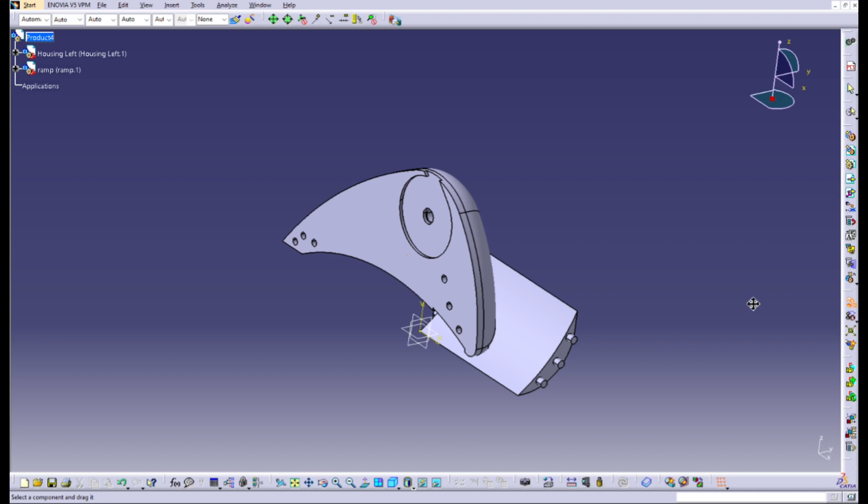To overcome the problem, we can choose a tool called manipulation, and we can rotate using the z-axis rotate on the ramp. So the ramp will be rotated along the z-axis. Just rotate it like this.

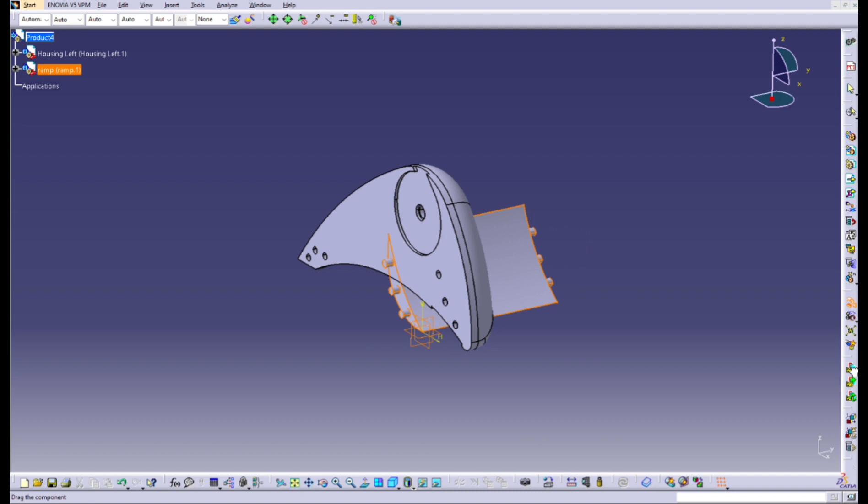We don't have to be really accurate actually. After it's rotated, we can just move it along the y-axis, give it some space, and the x-axis, to line it up. As you can see, it's not perfectly aligned.

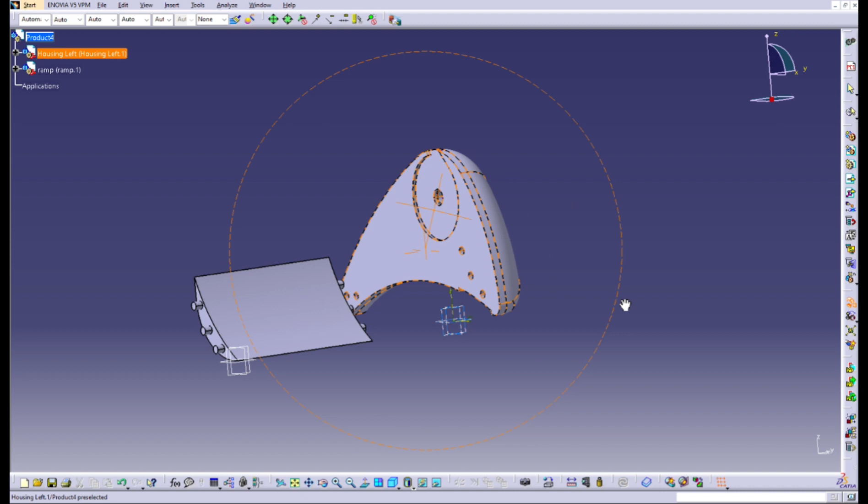To make it perfectly aligned, we can use another tool called coincidence. Basically it will center out all of the circles.

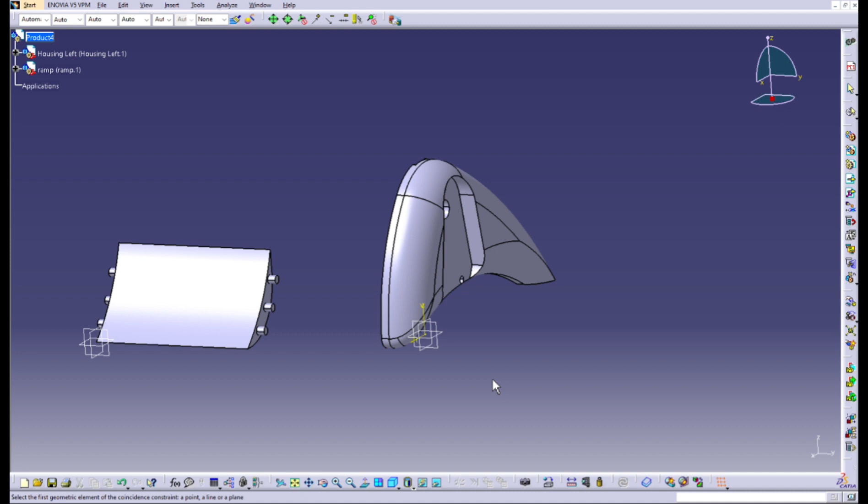First I'll explain the basic concept of our assembly. To assemble all of the parts, we're using something like a gunpla, so it's only a matter of connecting the male and female parts. Of course, it's not what they use in real world scenarios, but our team decided to use it since it was easier and simpler.

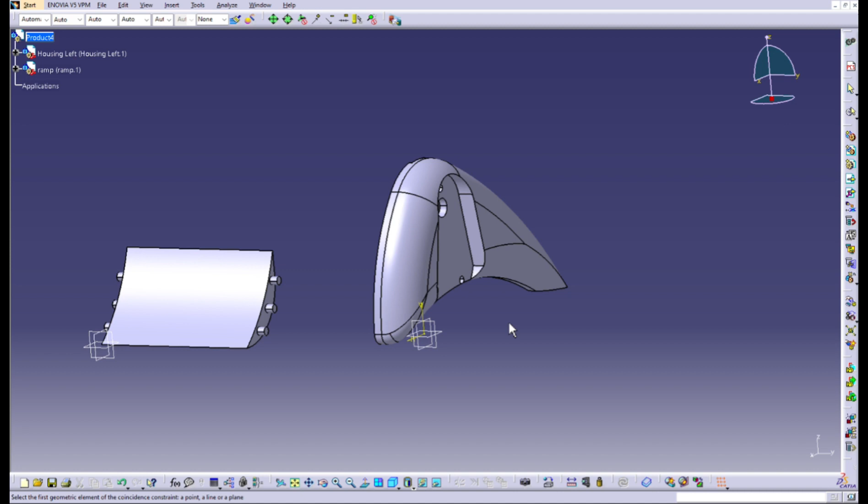So we have our coincidence tool right here, you can just click it. As you can see, there are 3 male parts here, 3 male and 3 female.

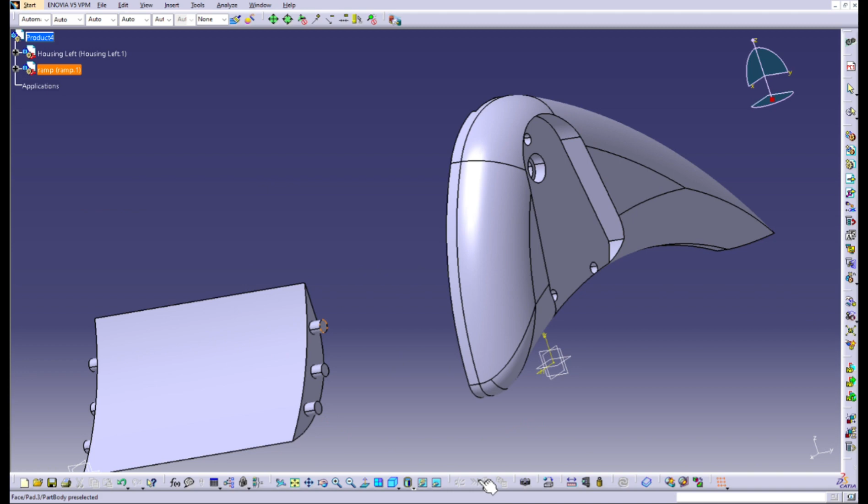We can choose the very top one for the male and the very top one of the female. If we update it, yeah, it's going to be perfectly aligned.

Actually, we don't have to connect the remaining male and female since it's going to be perfectly aligned anyway. But for these parts, I'm going to coincide it with the coincidence tools. There's redundancy because it's perfectly aligned.

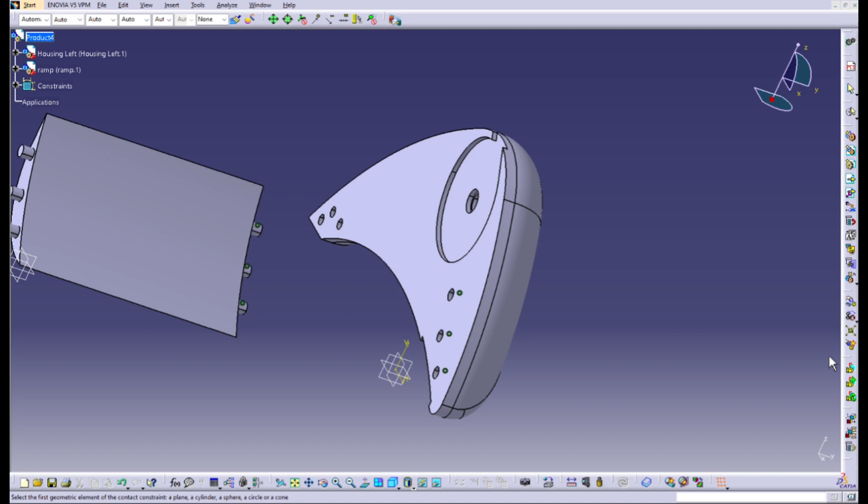Since it's aligned already, we can move on to the next step, which is connecting the parts. We can do it by choosing the contact tools right over here, by choosing this face, and connecting it with this face.

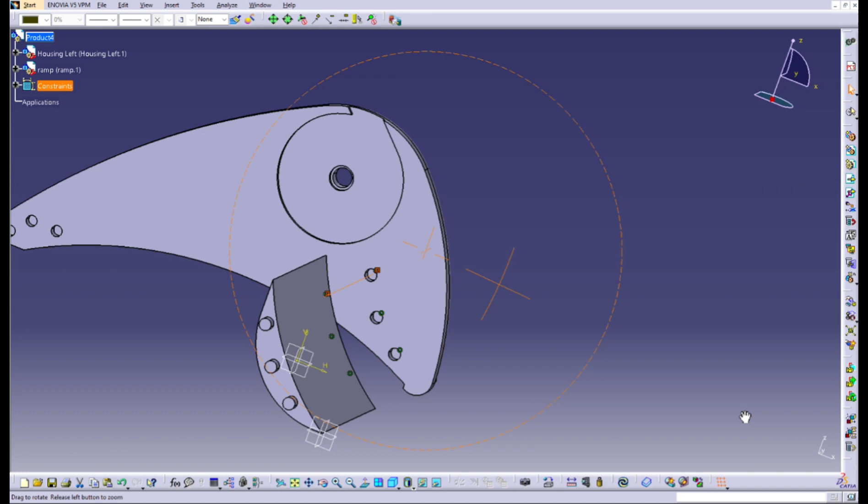Since the length of the male and the depth of the female are the same, when this face touches the other face, it will be connected perfectly.

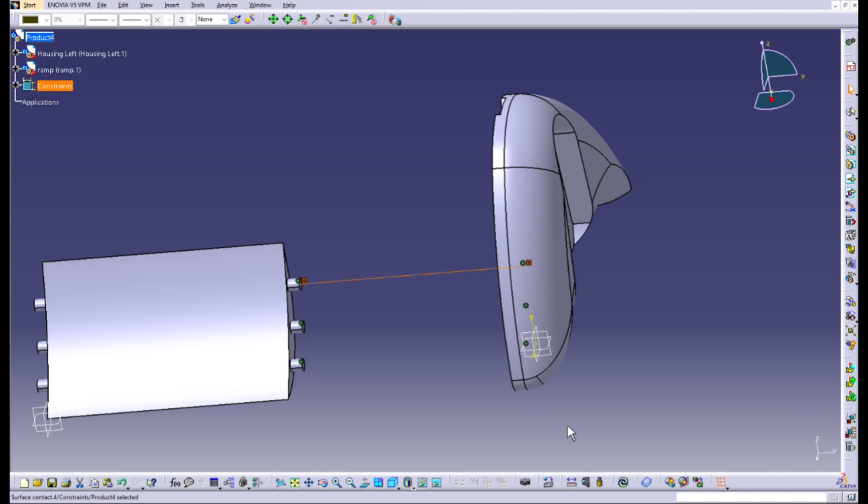To do that, we can just update. We can choose it through the edit toolbar, update, or we can do it right here, or we can just press Ctrl U, which I'm going to do right now. Okay, Ctrl U, everything is updated and it's connected.

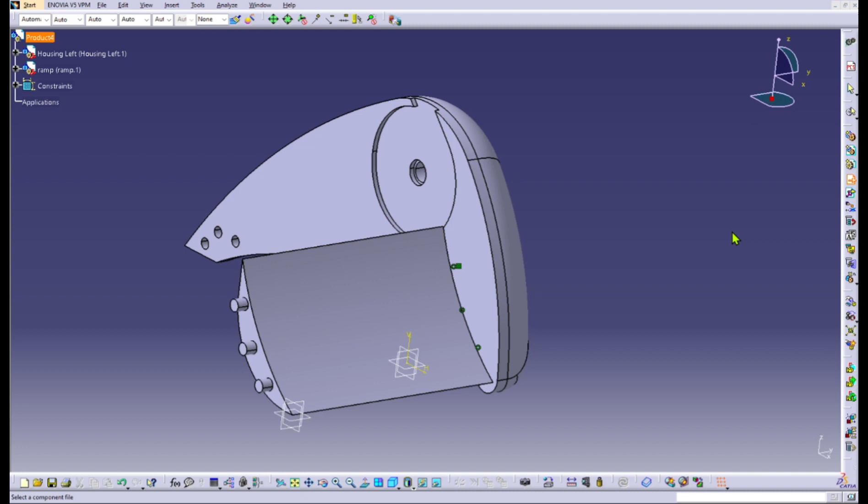One part's done. Let's move on to the next part, which is connecting the bracket. Same as before, choose this icon, choose the product, and choose the parts, the bracket.

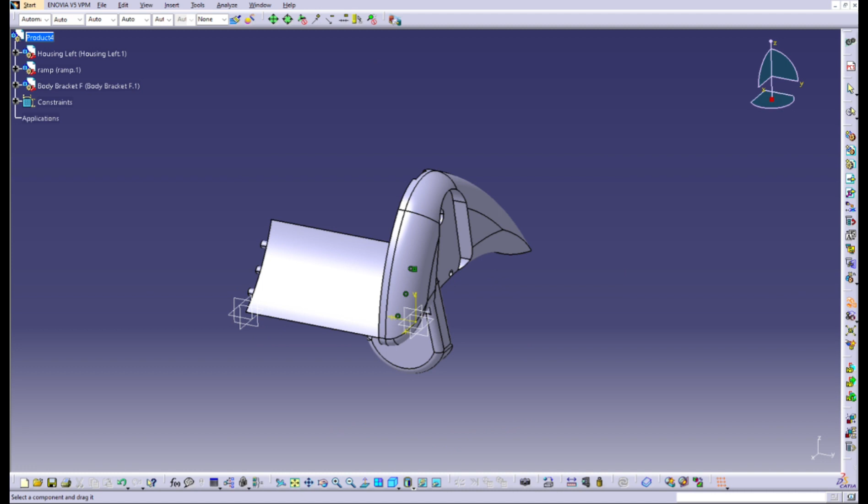The problem is the same as before, it's not aligned, so we have to do the manipulation again: along the z-axis, move it along the y, along the x. Okay, we're done, and you can just coincide it from here.

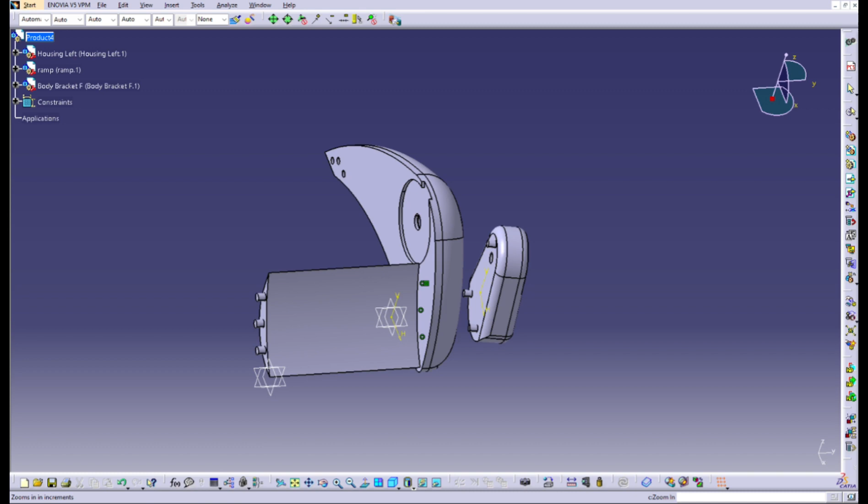Okay, so why am I choosing the middle part of it instead of all of the three male and female connectors? It's because all of the connectors here in the housing and in the bracket are calculated already. So since the middle part is perfectly aligned, all of the three male and female parts will be also perfectly aligned. So we don't have to do it.

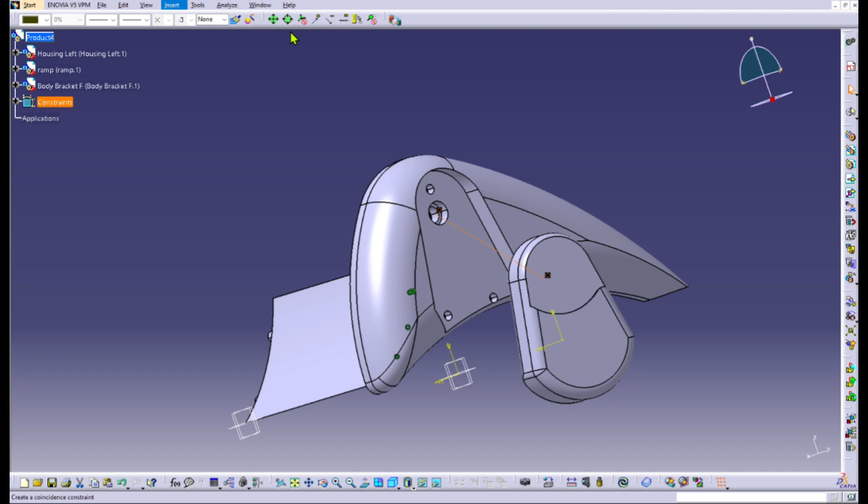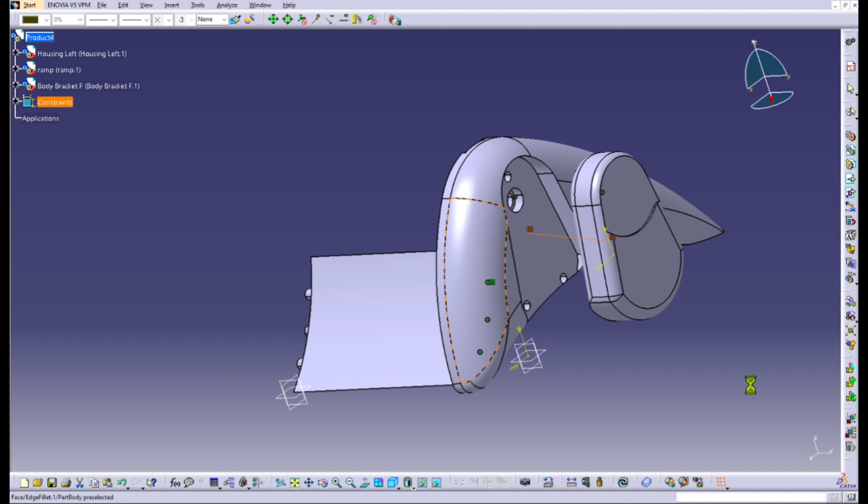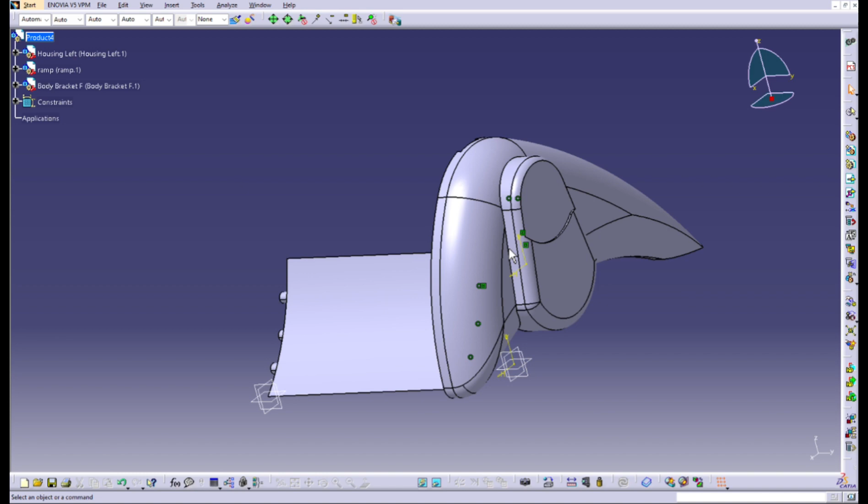Okay, let me show you. Update. Okay, it's perfectly aligned, and we can connect it by using the contact tools again. Choose it right here, choose this part, and see, when it shows something like this, a square one means connecting tools, and the circular one means the coincidence tool. Since we have that, it's good already, and we can just update it. Okay, when it turns green, it's already good.

Okay, now we have two parts connected into the main housing. And for now, let's move on into the next part. You can choose it from here, product, and for the next part, I'm going to choose bushing.

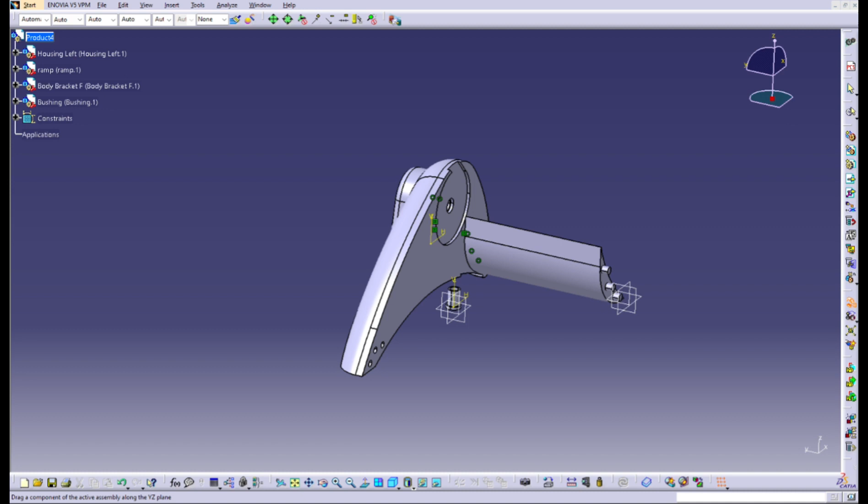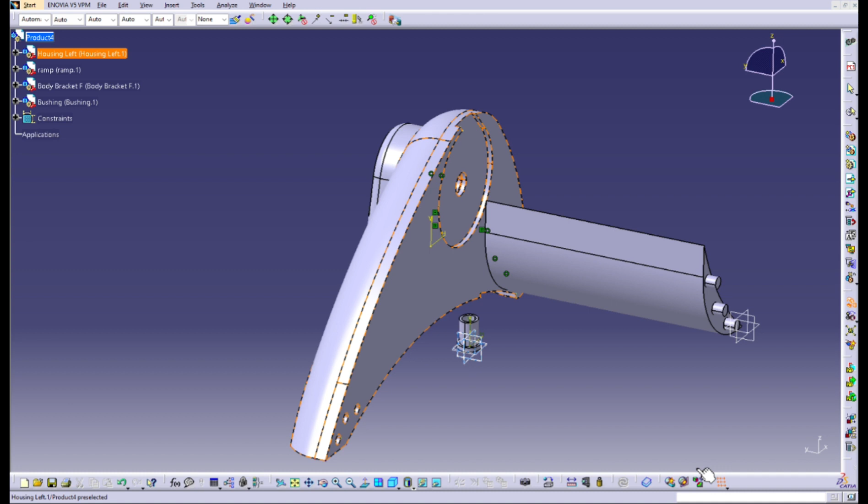Okay, so the bushing is not aligned and facing a different direction than the others, and we can fix it with the manipulation tools. As you can see here, there's the y-axis over here. We can just rotate it... no, I'm sorry, that's the x-axis. So we can just connect it, rotate it along the x-axis.

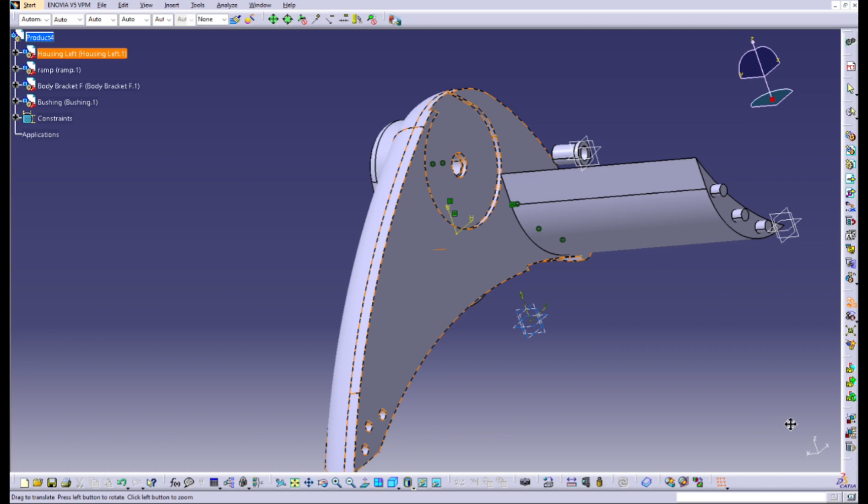And move it along the y, move it along the x, the z. Okay, here I wanted to give it some space because the space is very tight, and we have to connect this face, a very small face. So I'm giving it some space. Okay, same as before, we have to connect it, but first thing first, we have to coincide it.

Middle. We can just update it. Okay, it's aligned already. Since it's aligned already, we move on into connecting it.

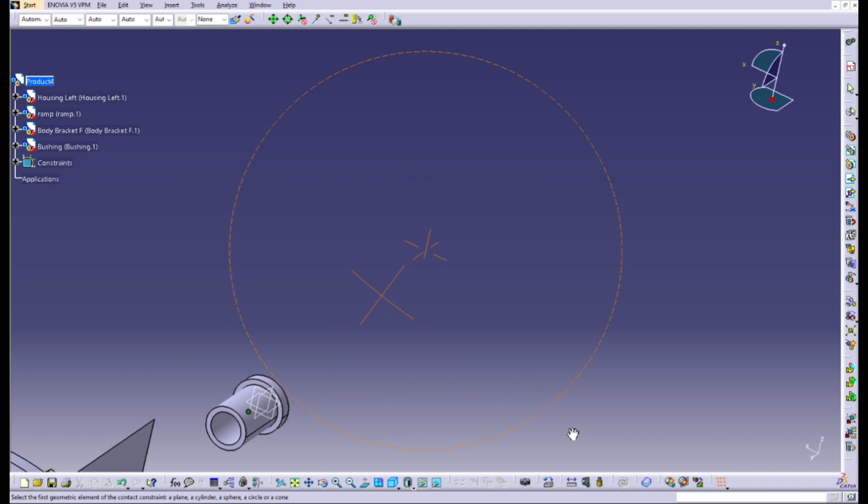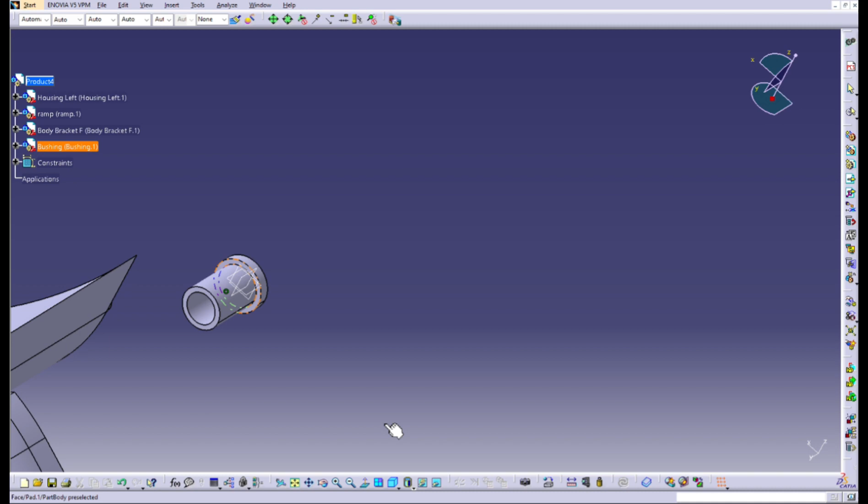Okay, so the face over here on the bushing. Make sure the two lines are highlighted. That means we're not choosing the line, instead we're choosing the face. Right here, I'm going to try. Okay, so both of the lines are highlighted, that means we're already choosing the face, and just left click, and same as this one, we're going to connect this face into this face.

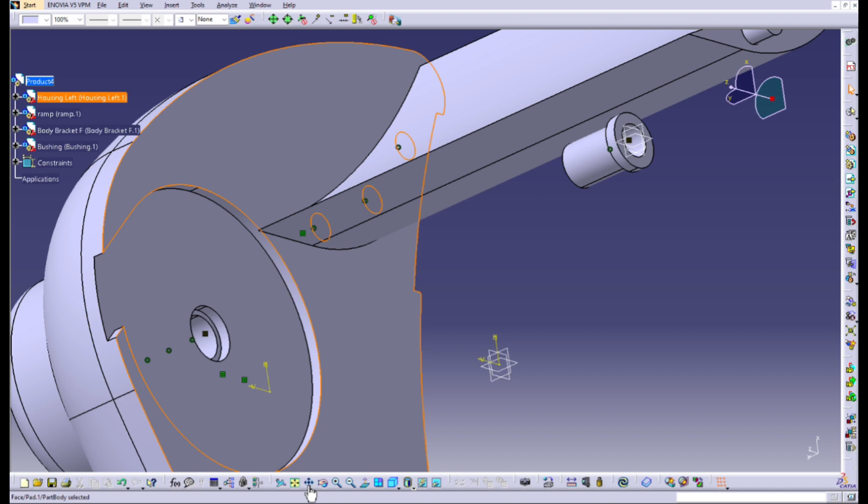Okay, the square symbol appears, and we can just update, and it's connected. It's all good.

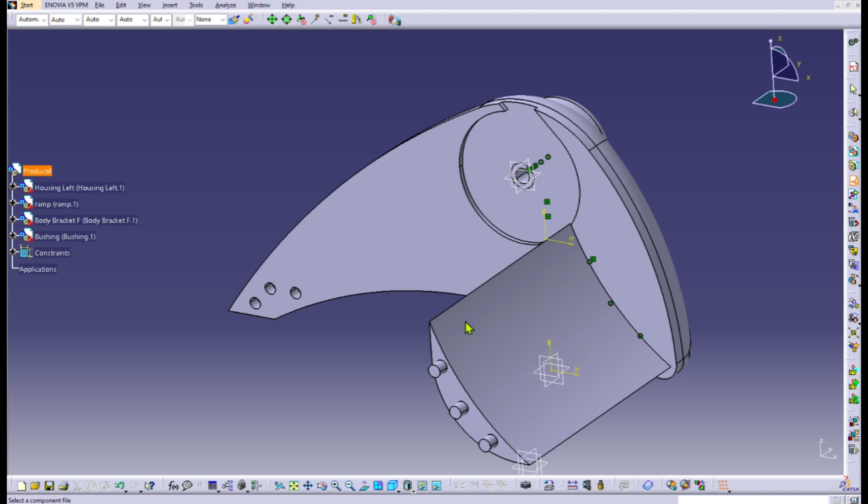Okay, now we have three parts connected into the housing. Now let's move on to the next part, which is the shaft. Okay, I'll open my file. Okay, now we have the shaft, but same problem.

It's not facing the right direction, so we have to do the manipulation again. Okay, we have to rotate it along the x-axis right here. Rotate it, move it along the y, move it along the z.

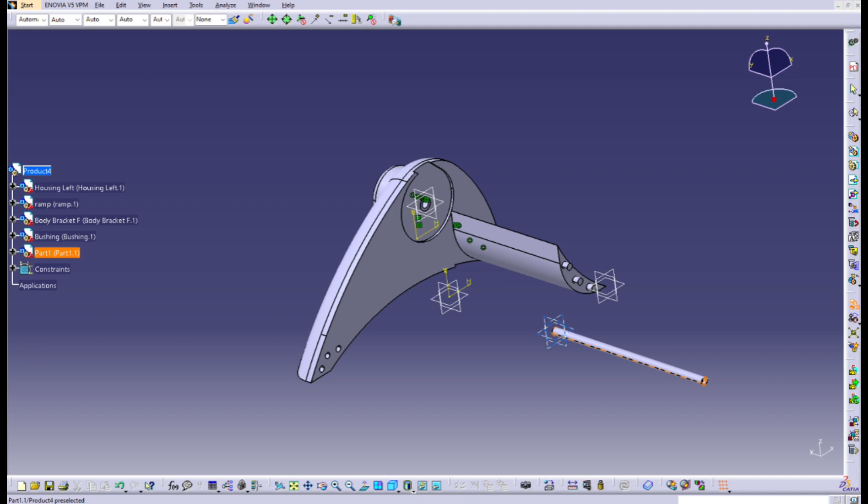I think it's good. Now you just have to coincide this shaft into the middle of this hole. Okay, just Control U, and it's aligned. See that symbol? Green symbol means good.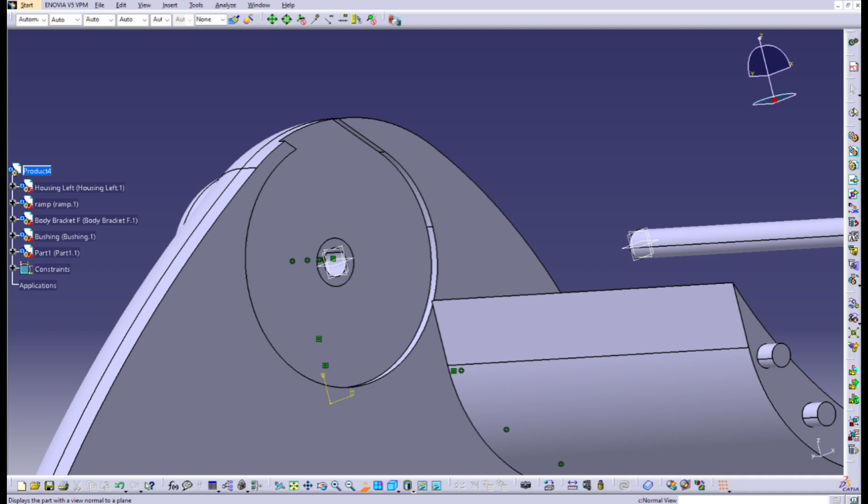Okay, now we have to connect it. Okay, make sure to select the face, and after this we have to connect the shaft into the body bracket. Update. Why body bracket? I'll explain it after this, after we've done the rotor.

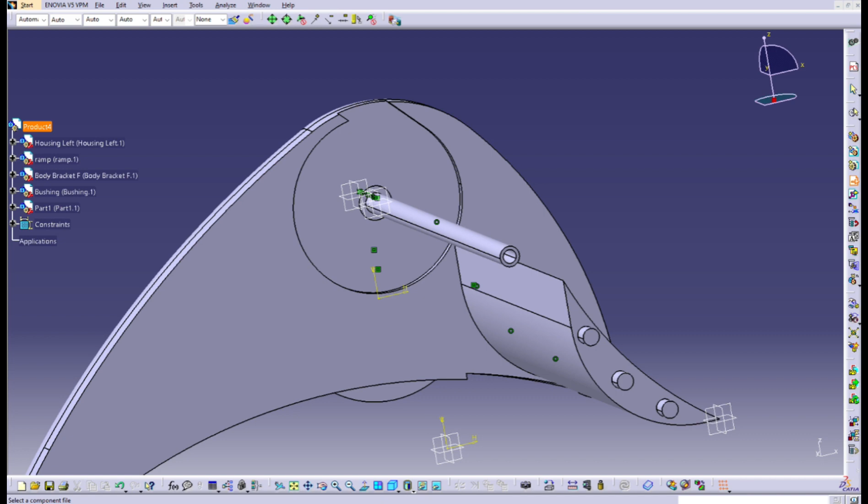Okay, now we can move on to the next step, which is adding the rotor into the build. You can do it by choosing this icon and choose product, then choose the rotor.

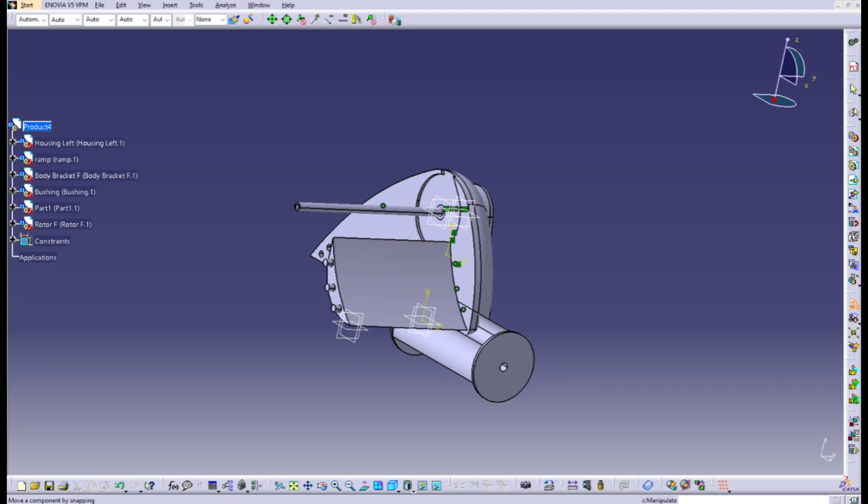Okay, now it's always the same problem, it's not facing the right direction. Okay, we have to do the manipulation again. Okay, it's facing the wrong direction, sorry. Rotate it along the z-axis. Move it along the y, along the z.

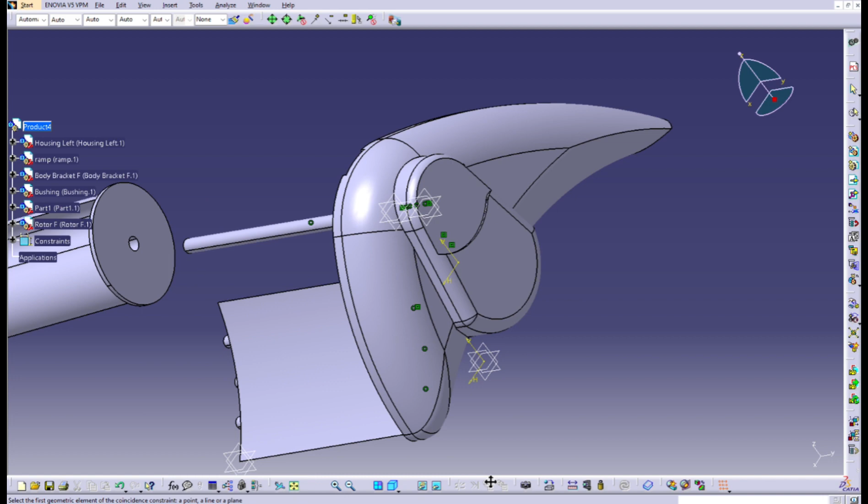And we can just directly coincide it from here. We don't need to rotate it very precisely, the tools will do it. Okay, update, and we have to connect the rotor into the shaft.

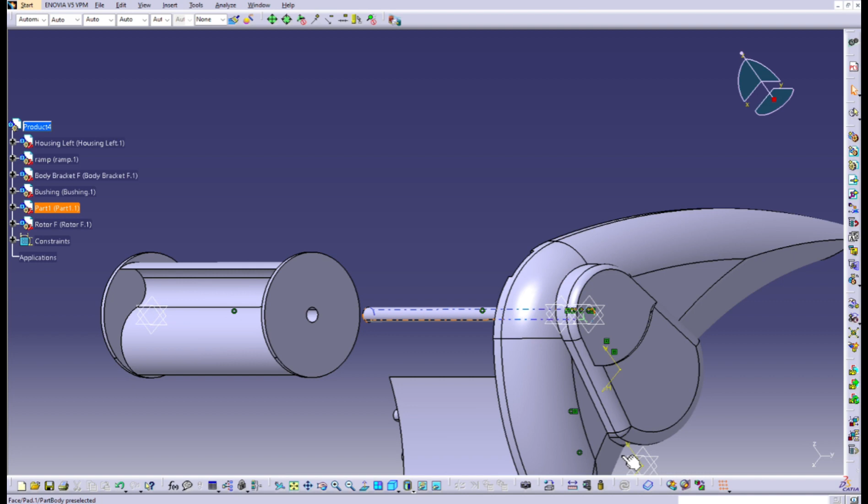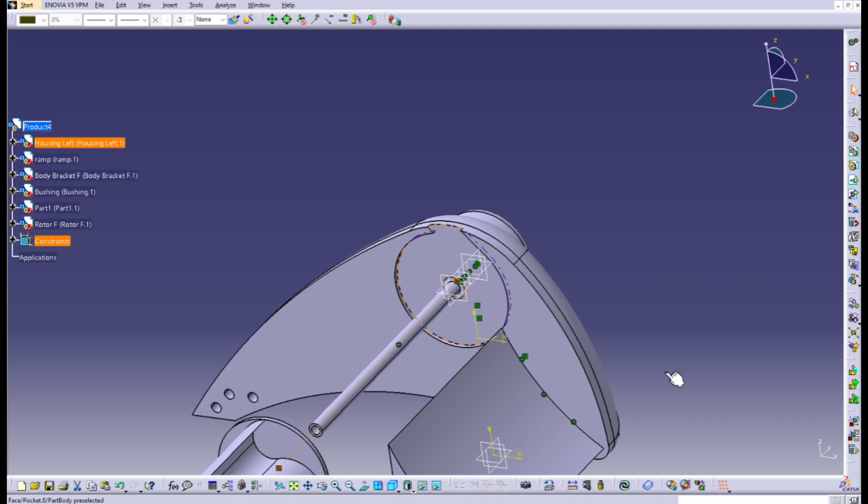But since the shaft doesn't have any surfaces to line to, we can just use the contact tools, and choose this face, and we can just select this face on the body bracket. So we have to select the face of the circle on the rotor and select the face of the circle on the body bracket, I mean the housing, and we can just update it. Okay, and it's connected right now. So basically this shaft and rotor are connected.

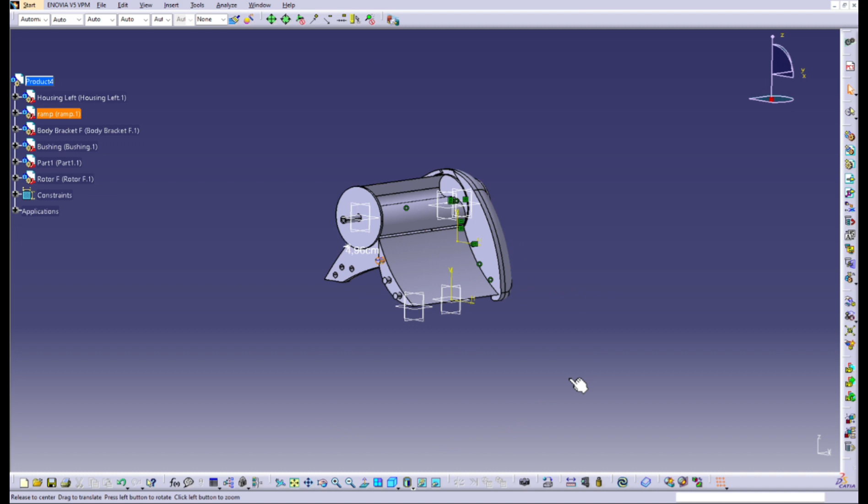Okay, now since we got the rotor, the body bracket, the ramp, the bushing, the shaft, it's a matter of completing the builds. To complete that, we have to put the right side of the body bracket. Oh yeah, but first we have to connect the bushing, the right side bushing.

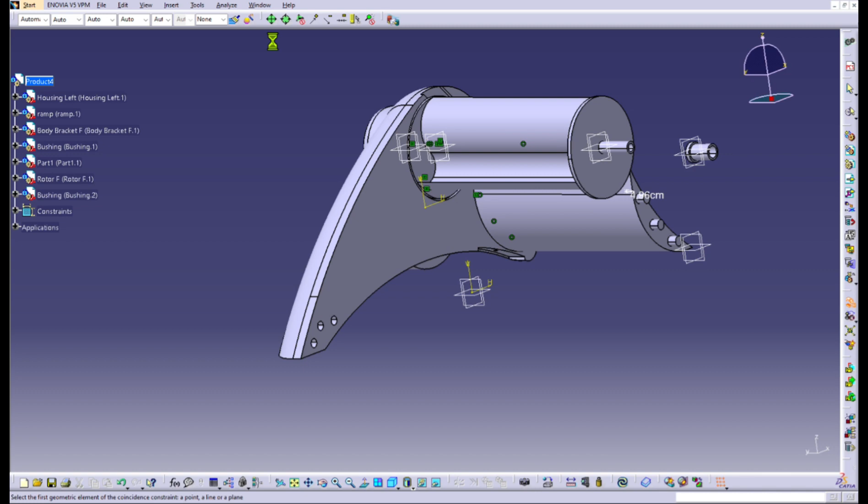Okay, now we have the same bushing. It is going on the right side, so we have to rotate it again in the X direction, move it along the Y-axis, move it along the Z. Use the coincidence tools to connect and align them all.

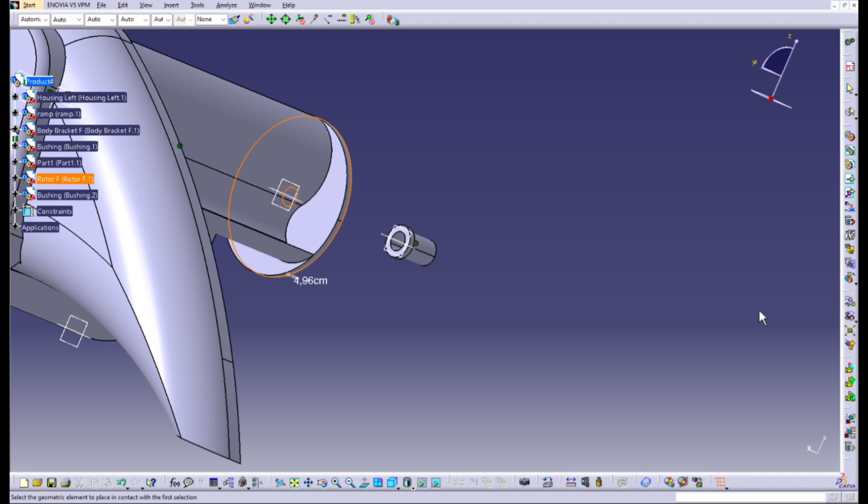Okay, connect this, update. It's already connected, and we can just make contact here, or we can make contact here to the housing.

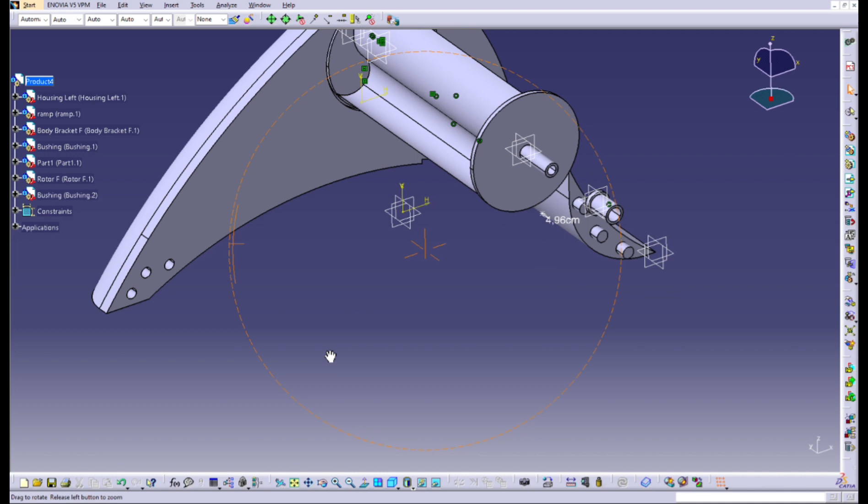Okay, so right now I'm just going to put the housing, the right side housing. Oh yeah, but since the right side and the left side housing are separated and there is nothing to support them all, I make another part to support it, called the housing connector.

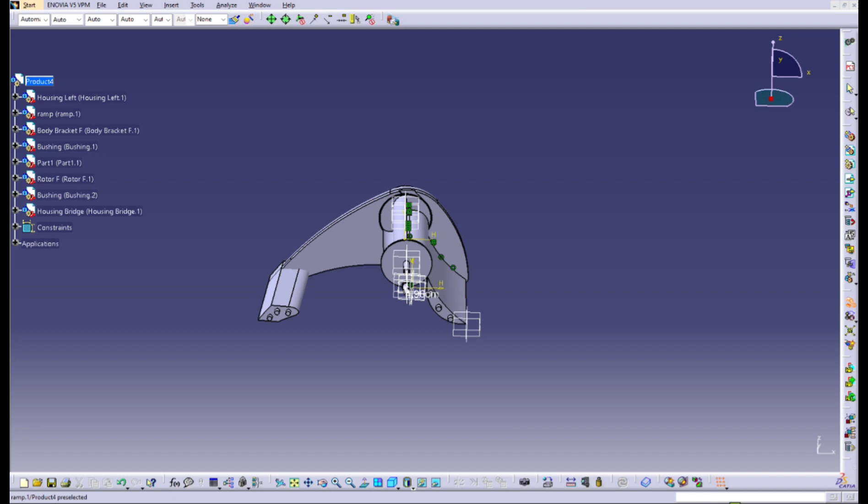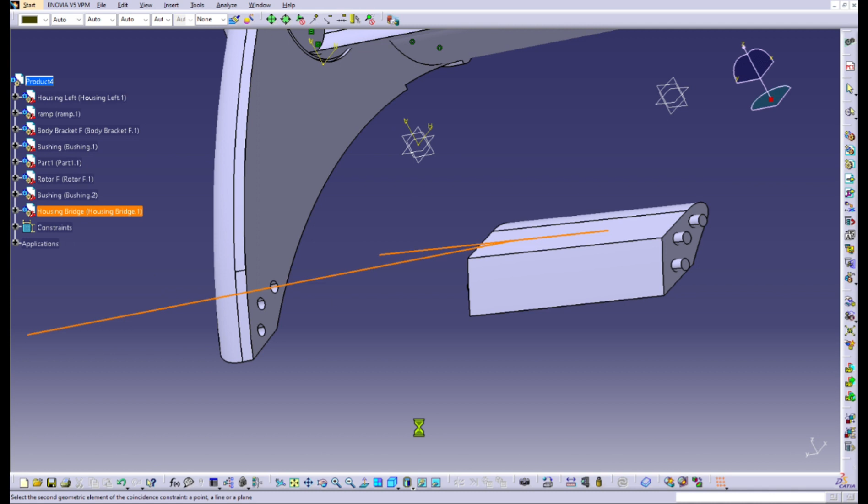and make a contact here to the male part, female, and update. It's already connected. Okay, we got the connector, and now we can bring the right side housing into the build.

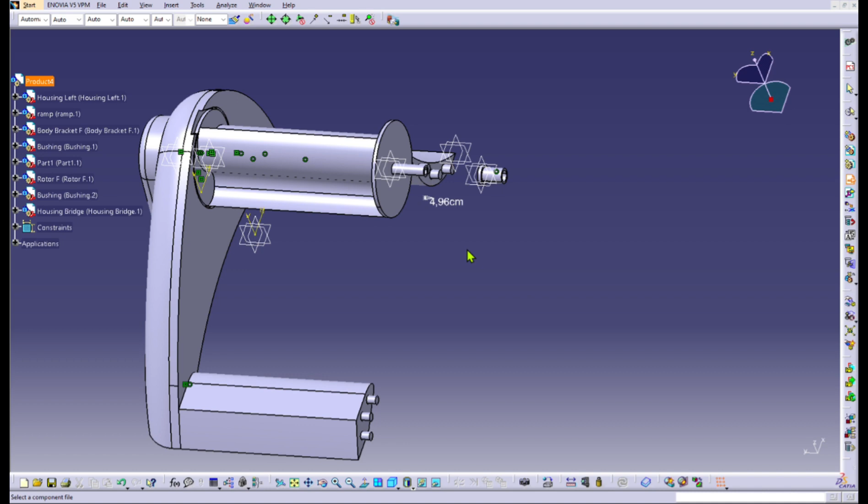Okay, this is our right side housing, and we have to do manipulation on it. Bring it to the right side, give it some space. Use the coincidence tools to make sure that the middle part of the housing is connected

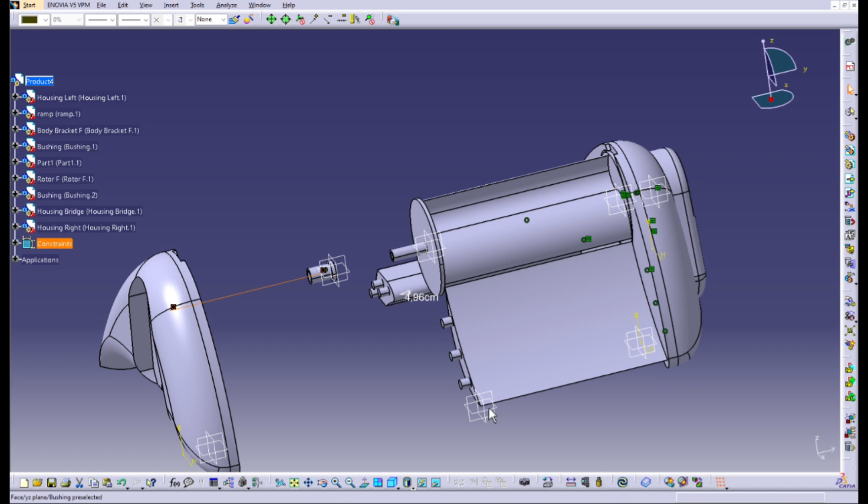into this bushing. Since the bushing is already aligned with the shaft, the right side of the housing will technically align with the shaft also.

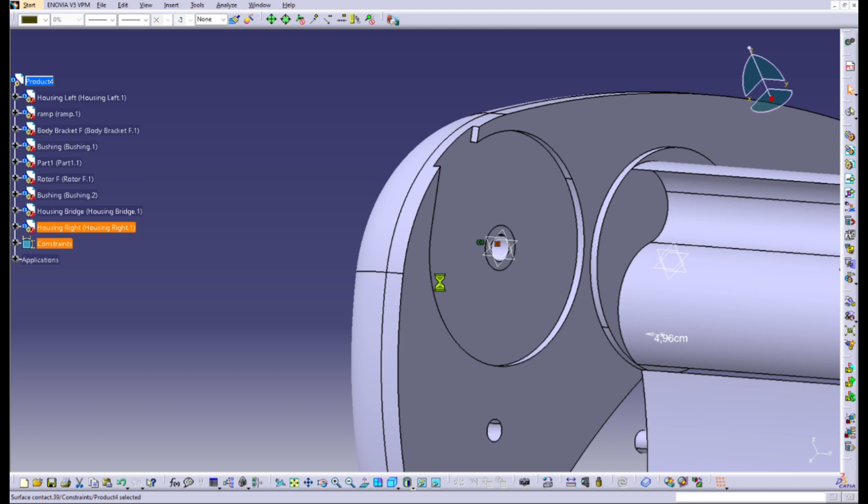Now we just have to use contact tools over here and connect it with this face of the bushing. And update, it's now connected, and you can use contact tools to connect it all.

Now it's connected. Okay, so if you really pay attention on the first step, the whole left side of the housing is 5 centimeters, but the right side of the housing is 4 centimeters.

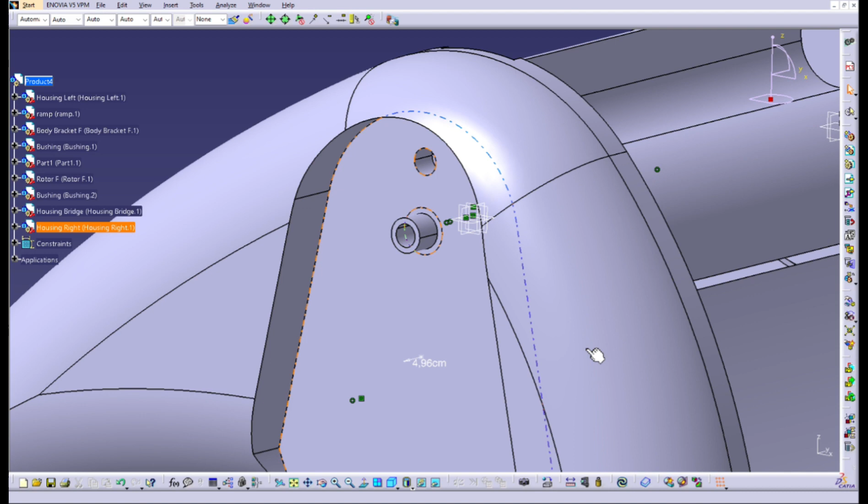And which one is right? Why is it different? So it appears there's something like an error on the left side. It's supposed to be 4 centimeters, but right now I already updated it, and we can see right here.

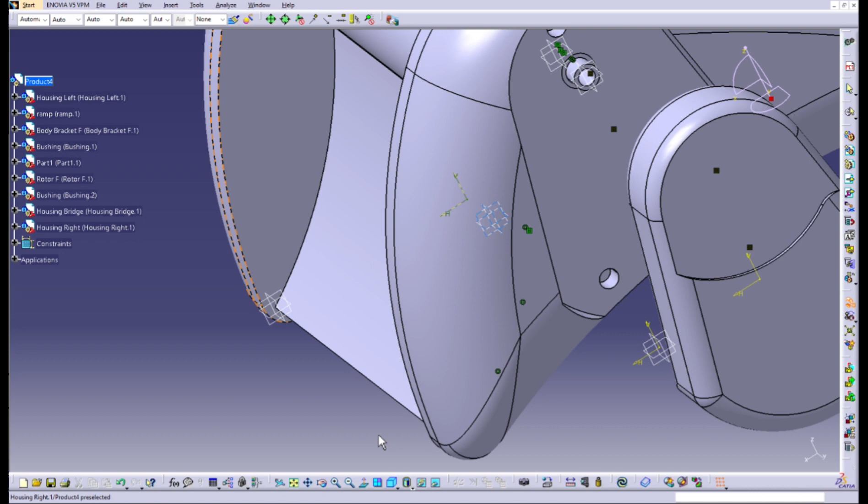Manipulation, okay, we can move it. Now it's completely sealed. On the first steps, the step when I connect the body bracket and the housing, you can see that the hole

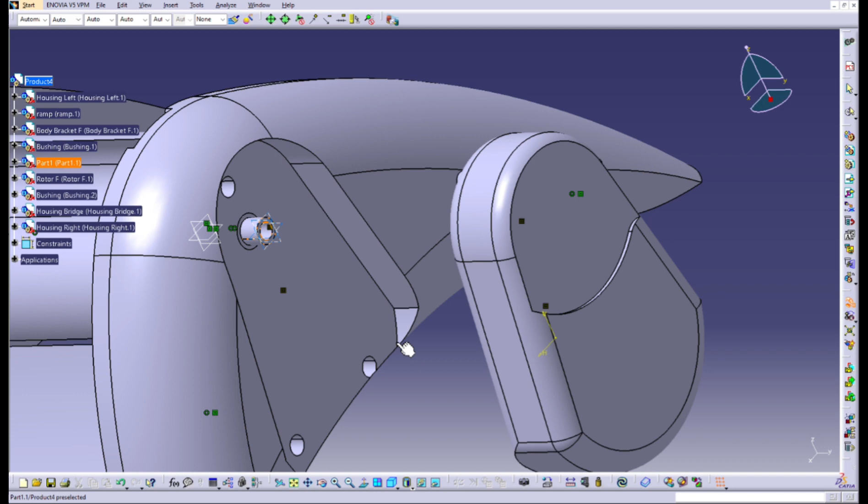is not filled. There's a gap between the housing and the bushing. But right now it's already fixed. It's my error. Okay, since everything is clear right now, we can move on to the next steps.

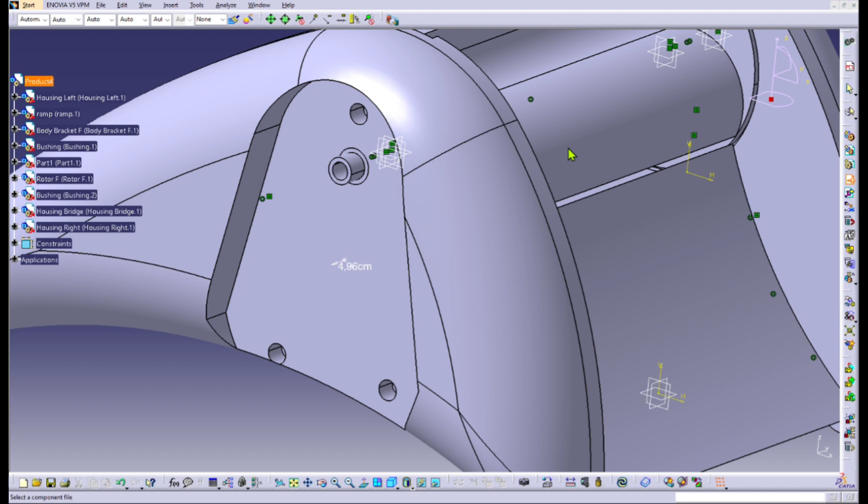Okay, now the last step is connecting the body bracket for the right side of the housing. Okay, we have the body bracket here.

It's facing the wrong direction, so manipulate it, rotate it along the Z-axis, and move it along the Y. And since then, we can just coincide

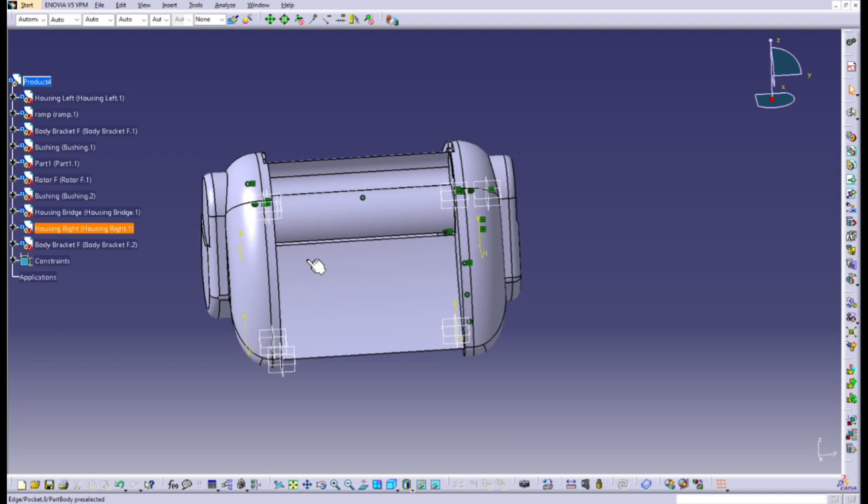this part over here. Make contact also on the male and female part, and just update. Okay, now the main component is already completed, but we have one more

part here, which is the base, or the bottom part, or the foot part of these builds. Okay, now we have the front base, or the front foot of these builds.

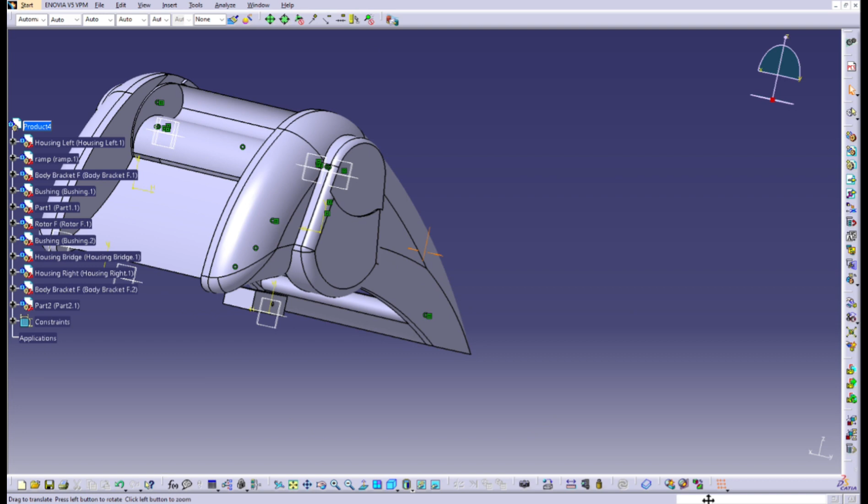Now it's not aligned properly. We just have to rotate it on the X-axis, rotate it on the Z-axis, move it a little bit to the front along the X-axis, and give it some space.

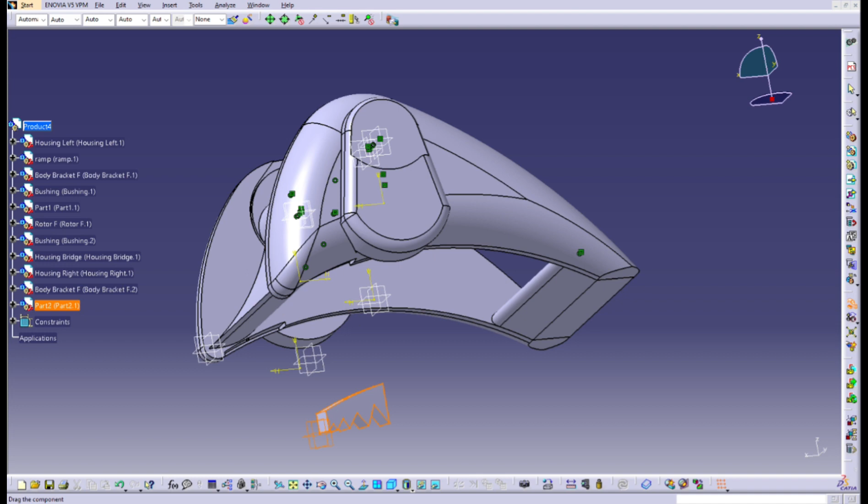Okay, now as you can see, it's a female, and it's also female. Then how can we connect it? Since both of them are female, I have a part here called the base connector, which will act as the male part.

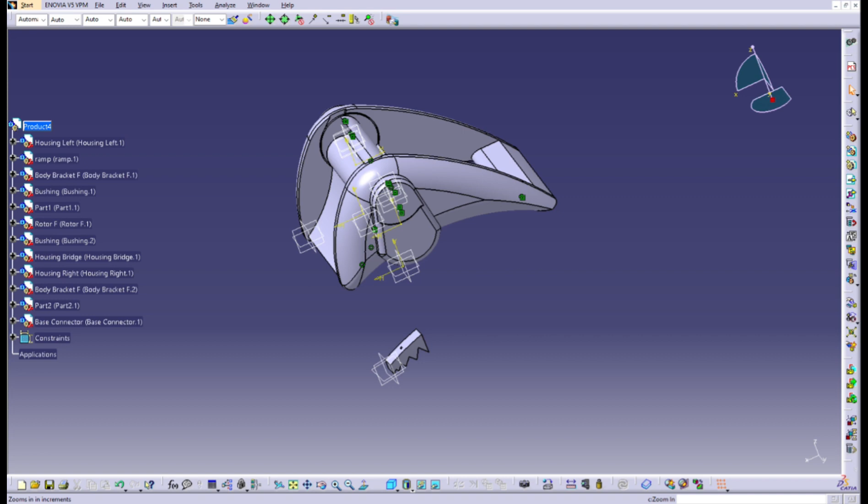Okay, now we got the parts right here. Sorry, yeah, we got the base connector right here.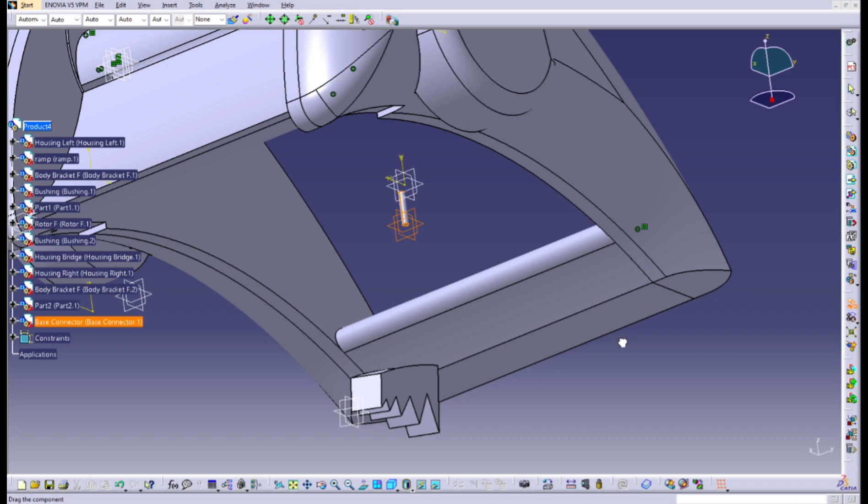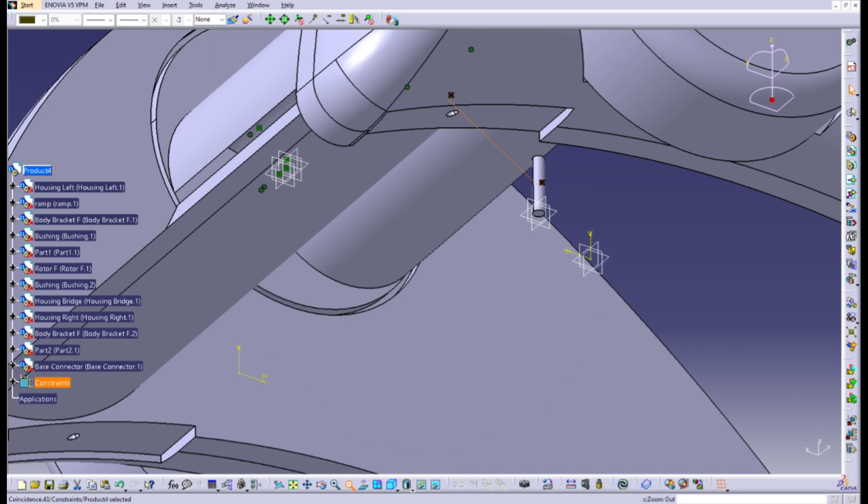Just made a rough alignment since we're going to use the coincidence tools anyway. Okay, use the coincidence tools, connect it into this female part, and update. Yeah, it's perfectly aligned right now.

Now what we should do is connect this part. It's quite deep. Okay, we got the first face and the second face connected, and it's not green since we've not updated yet. Once we update it, it turned green, and it means good.

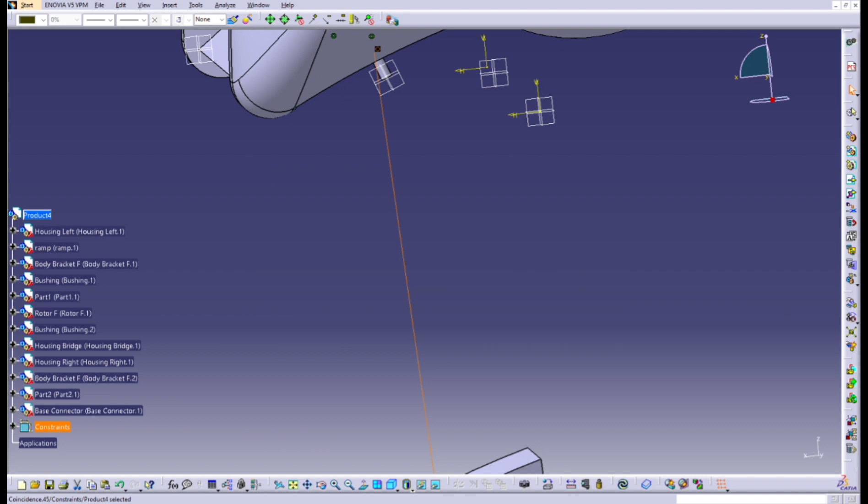Now for the base, same like before, coincidence tools is the hero right here. Update, it's perfectly aligned right now, and just make a contact between this face and the face of the base, and update. Now it's perfectly connected. Left side done. Now let's come into the right side.

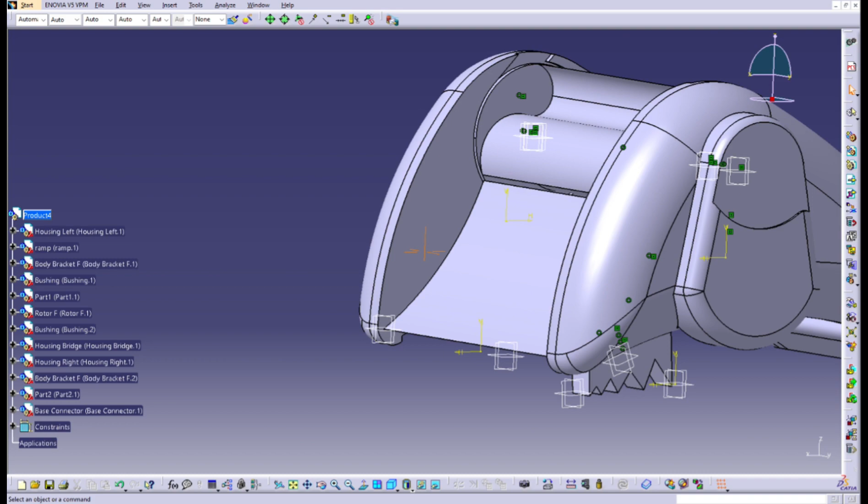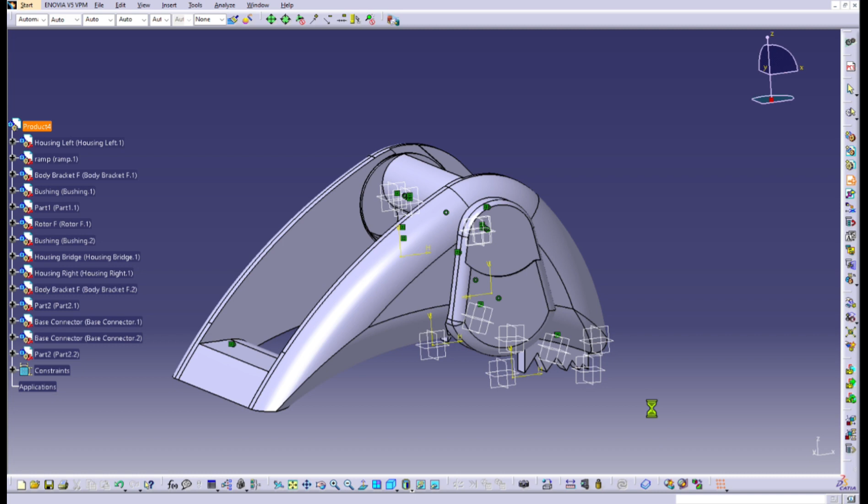And it's done. And for the back part, we also have the base for the back part. We just have to import it again, and I got it. I got the parts here, the back base. Yep, right here. Okay, it's not perfectly aligned, so we need to do the manipulation again.

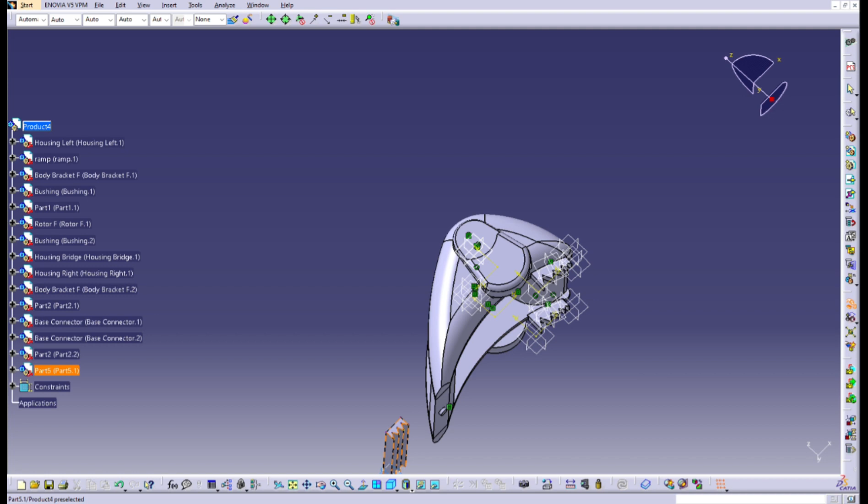Move it along the Y, move it along the X, I mean, and along the Z. Yeah, as you notice, there's like a male part here that's never been here before. Why? Because it turns out that I used the old part of the housing bridge, so yeah, I already changed it into the newer part, so there is like a male part here.

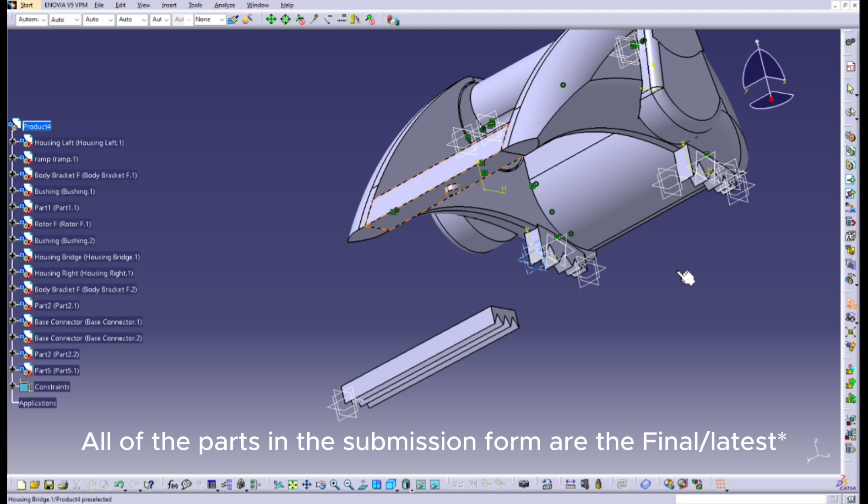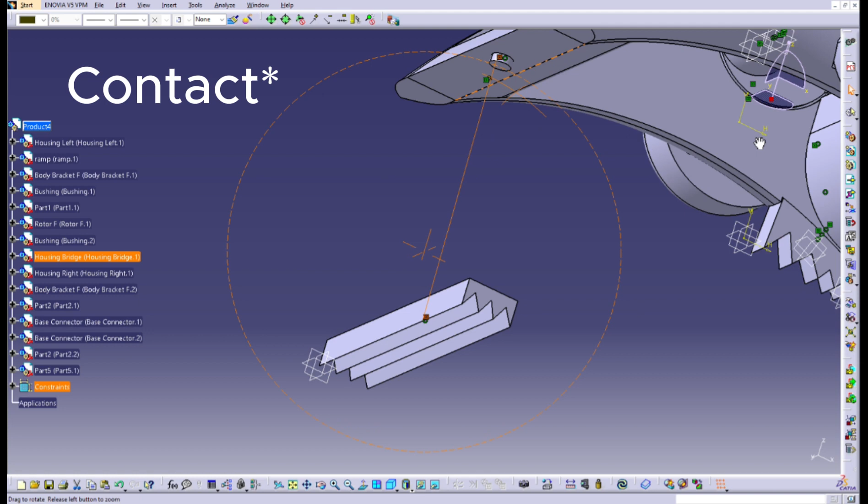And yeah, it's basically same like the other steps. Just use the coincidence tools, coincide both of female and male, and update. After that, just use the contact tools and just update, and it's perfectly aligned. Yeah, so that's the last step of this build. Then our build is completed.

And yeah, to test whether our build is already correct or not, we can test the clash. We can test whether there is a clash or not. If there's a clash, then there's some sort of problem with our builds. And if there's no clash, that means our build is already good. Just apply, and so far so good. We got no clash here. Yeah, the clash is 0, contact is 28.

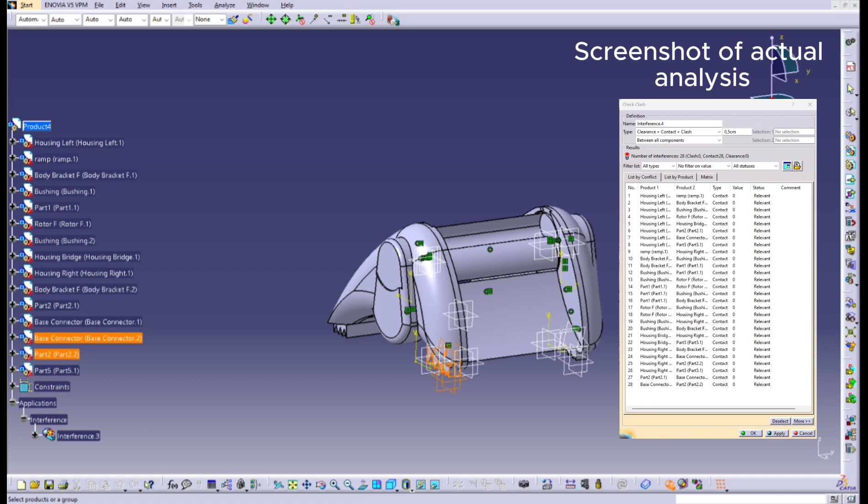So there are 28 contacts in total in our build. The first contact here between the ramp and the body bracket and the housing. I mean housing and body bracket and housing, and so on and so forth. Okay, all of the value is 0 and type is contact. There is no clash detected in our builds, so that means our build is good to go. It's already cool. Then it comes into the saving part.

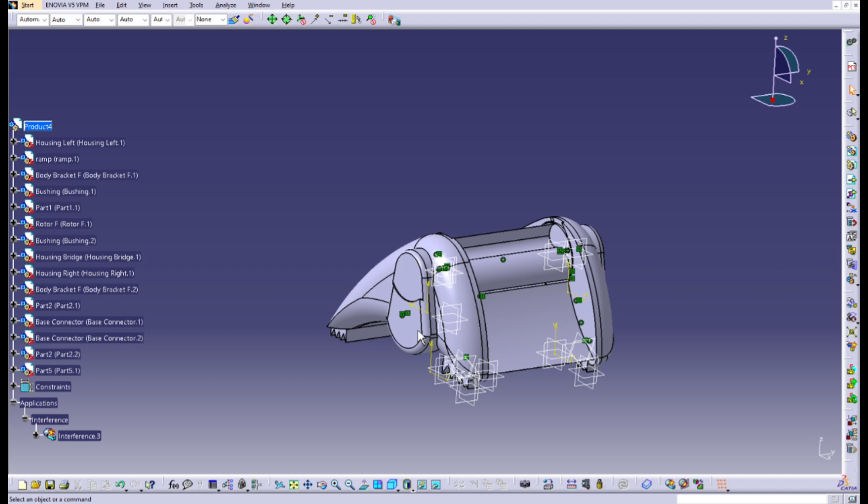We can just save as and put the product name. I'm going to put Waterotor complete assembly. Okay, I've saved it already, and actually we can put it wherever we want, but the most important thing is our assembly or the CATProduct has to be in the same file directory with all of the parts. If it's not in the same file directory, if we wanted to open the CATProduct later on, it's not going to be loaded. So we have to put all of the imported parts and the CATProduct file in the same file directory.

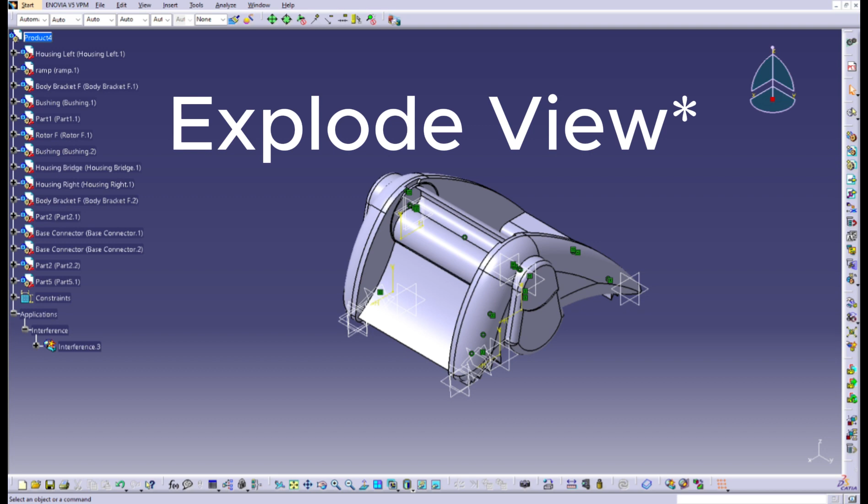Okay, now since our build is already completed, the next thing that I wanted to do is an exploded drawing. And to do that, first we have to put our builds in enhanced scenes. We can do it by choosing this icon over here, the right bottom part of the toolbar, and for the overload mode we just have to choose full. Okay, now we're in enhanced scenes.

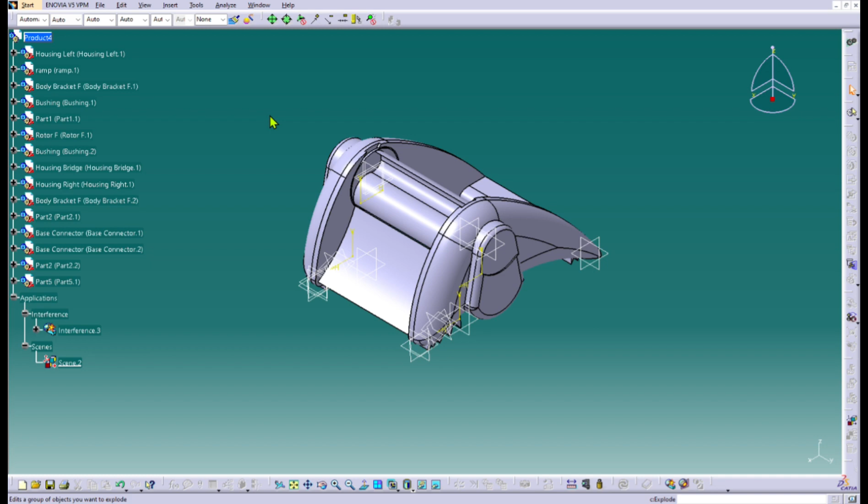Now to explode our drawing in enhanced scenes, there is an icon right here that says explode. Just press it once and choose all of the products that we wanted to explode, which is all of the parts, all levels, 3D, and apply. Okay, it's now exploded. We can set how much we want to explode the parts by scrolling this slider over here, but I'm just going to leave it on the very right, full explode, and just press apply, okay, and okay. And that's how you explode a build.

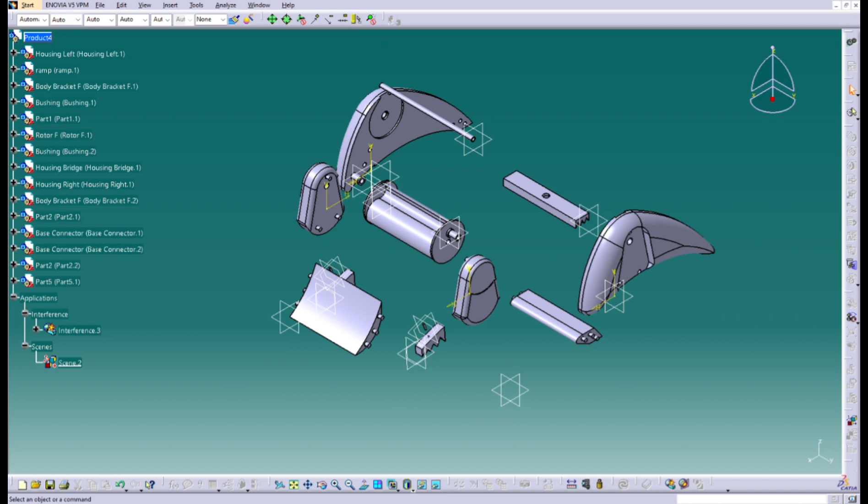Okay, I think that's all for me. It's already completed. So far we've covered how to assemble and how to explode these builds.